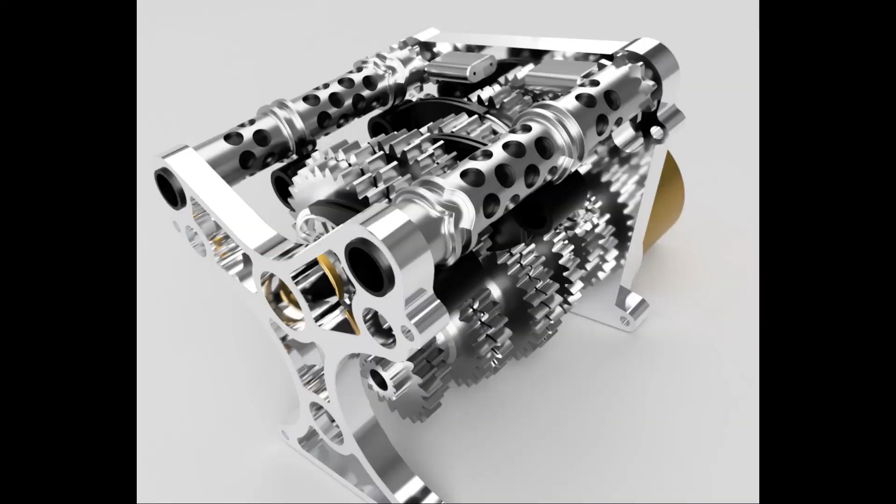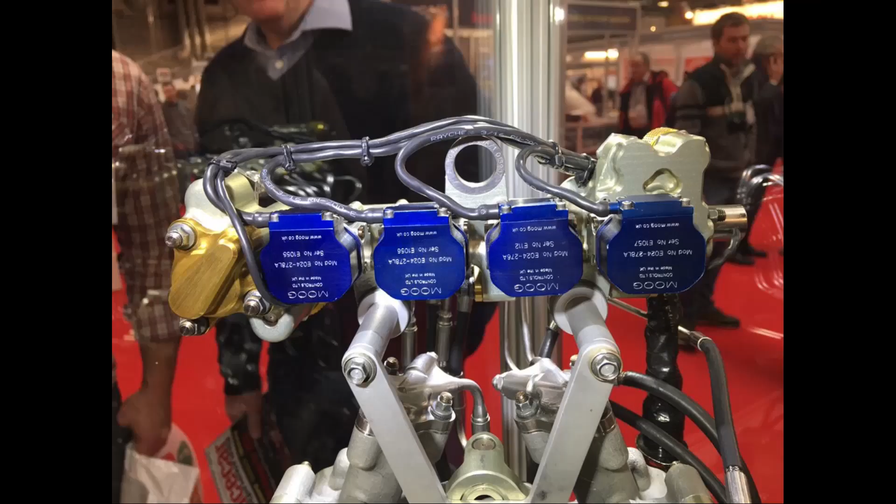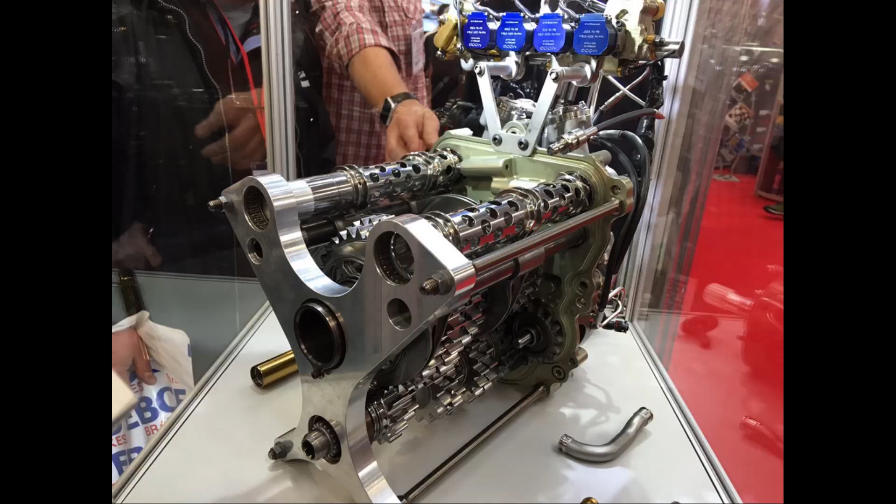Welcome everyone to the F1 Gearbox prequel episode. This episode will start off by covering how I designed the F1 Gearbox from limited information that was available, what I got right, what I got wrong compared to the actual F1 Gearbox, and what would need to be changed to machine a gearbox like this for use in an actual race car, and why you may or may not want to do that. So how did I design this gearbox?

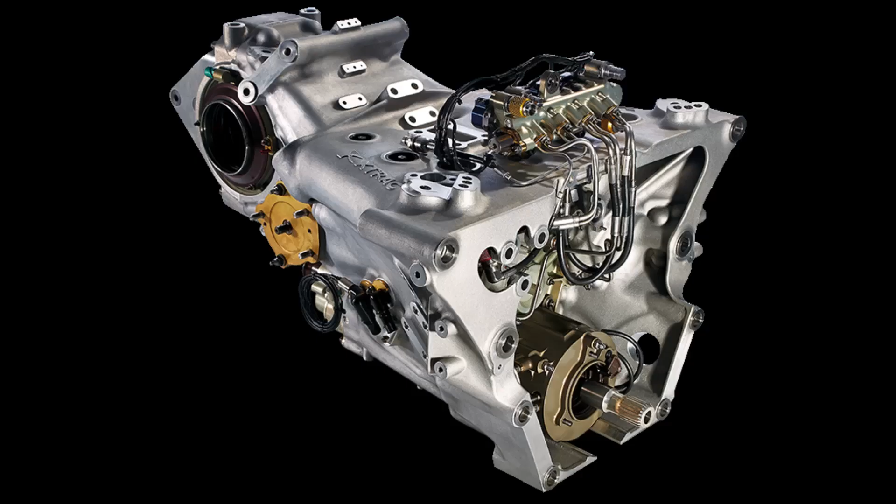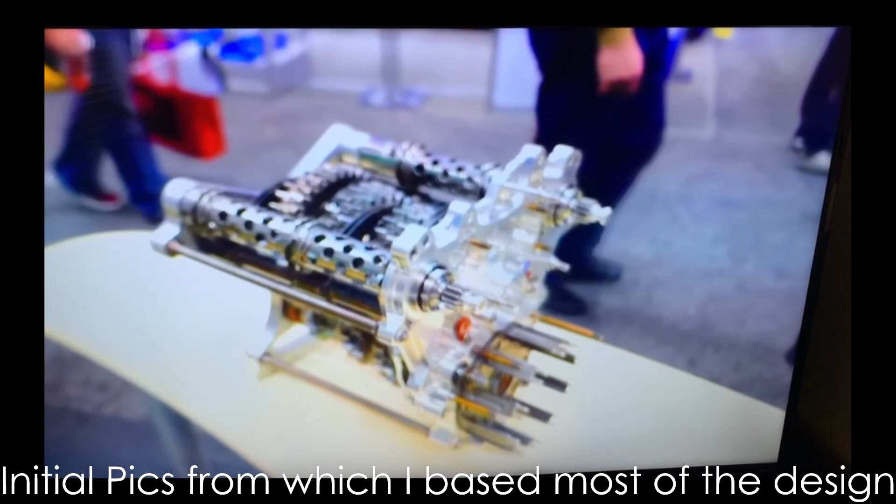Well, I don't want to talk about how I designed each and every part, but I want to highlight some of the approaches and lessons learned and how I designed some of the more challenging parts. Initially, I saw this gearbox about a year ago on a random YouTube video. I thought it was the most beautiful gearbox I'd ever seen. The level of engineering, perfectionism, and the attention to detail in each and every part was amazing. I thought it was a real work of art, and so I said to myself, I've got to build a model of that.

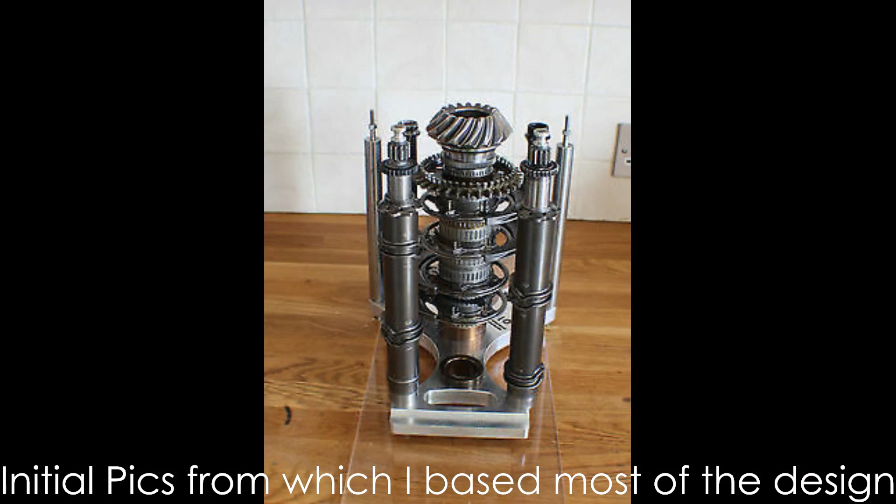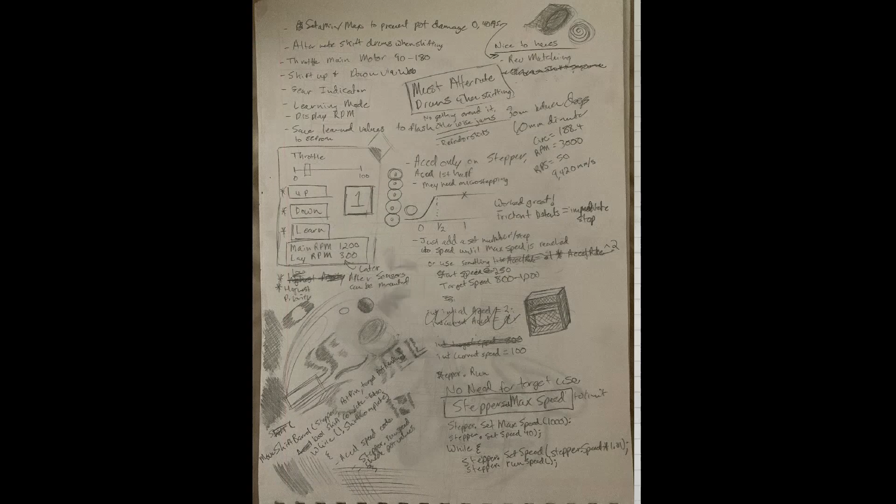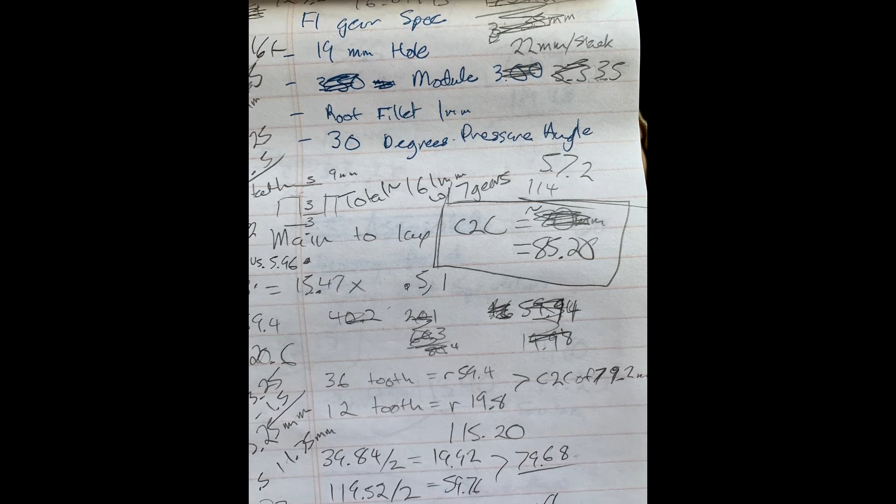I was limited on how much time I could work on a computer, so I conducted a lot of research over about a year there, and made a lot of hand drawings of the various parts and pieces for several months. Initially, I was only able to find a few pictures of the gearbox, so I actually reverse engineered most of the gearbox from just these few pictures that I just flashed up. I devised all the dimensions based on a few key dimensions I was able to find in the FIA rulebook and some various articles about Formula One gearboxes that I had read.

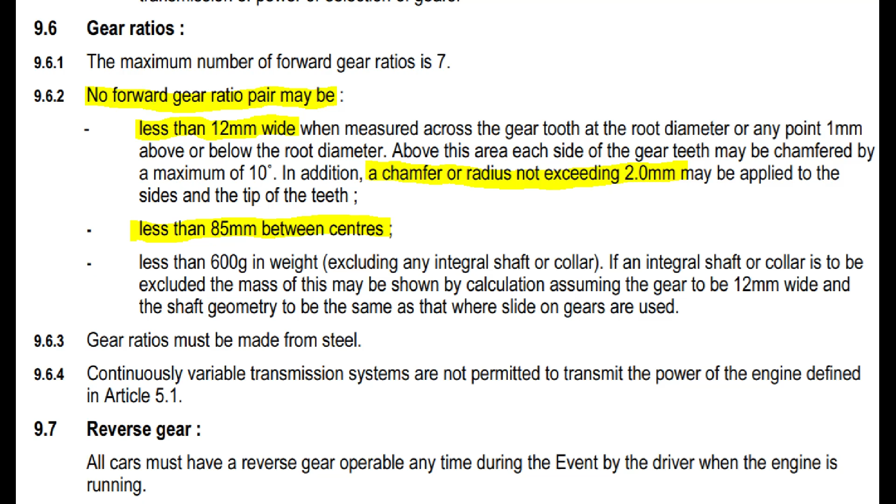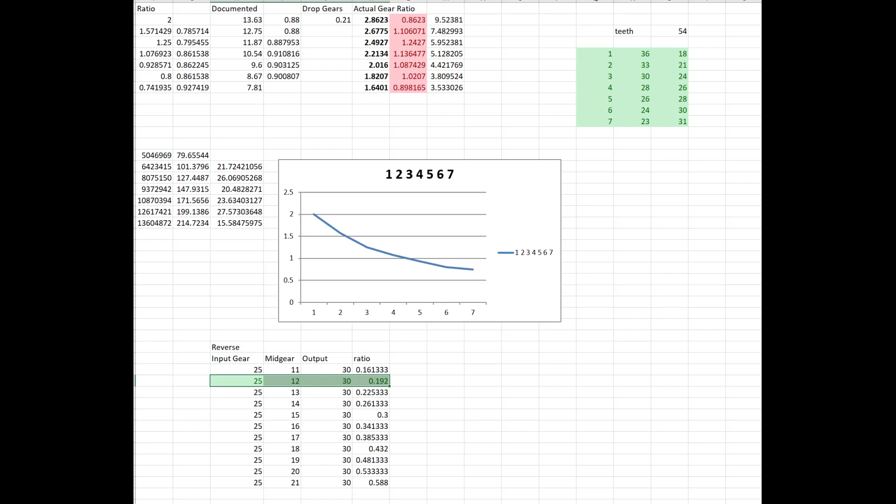Per the rulebook, I knew that the gears had to be at least 12 millimeters wide, and that they had to have center to center of 85 millimeters. I knew from reading online that these gearboxes were under 200 millimeters in length. I didn't have an exact length, but my goal was to be under 200 millimeters, and that the clutches and the basket that the clutches are in is around 110 millimeters in diameter. Everything else from there was really just eyeballing and filling in the blanks to try to figure out the dimensions of all the individual parts.

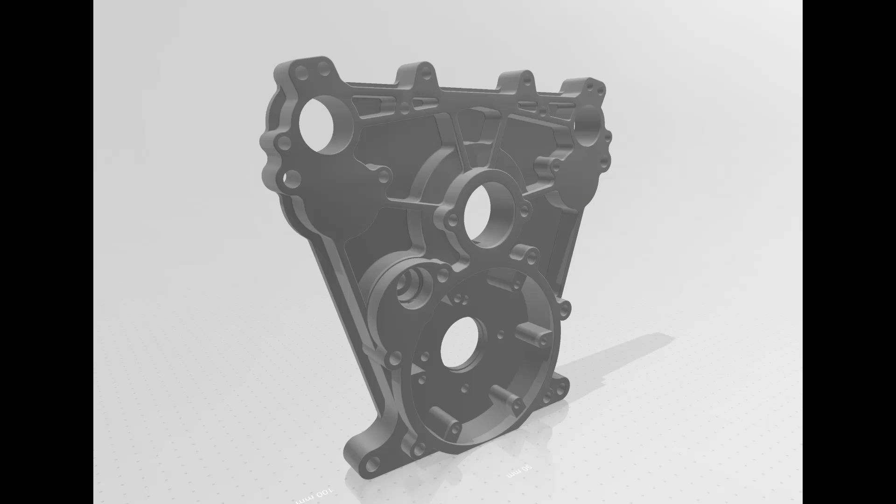So the first thing I did once I had access to Fusion 360 was I created at least 20 complete throwaway proof of concepts around each of the individual parts that I thought was going to be difficult to design, or I had a hard time envisioning in my head how they would fit together. I used these to confirm that all the dimensions would work and determine if the parts would be 3D printable.

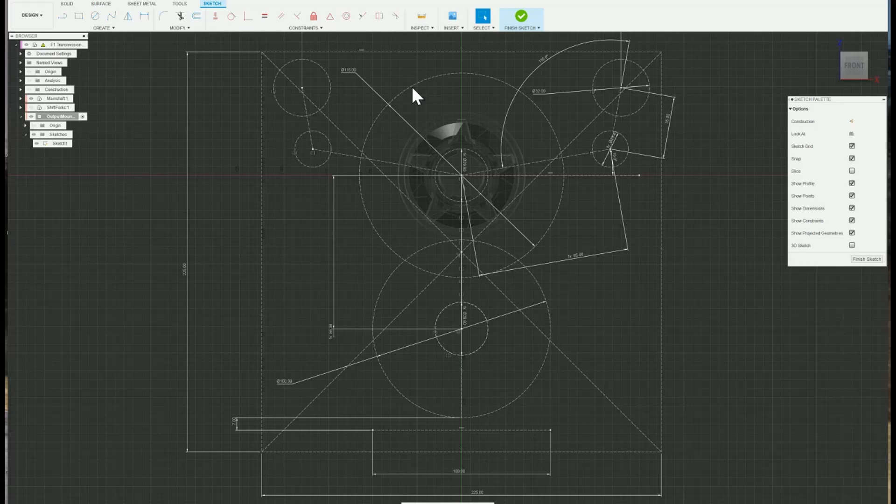Once I had my proof of concepts out of the way, I began laying out the overall gearbox dimensions. This first sketch that's up on the screen here is actually the template that allows me to lay out all the parts and pieces of the entire gearbox. It has where the rods for the shift forks are, where the shift barrels are. It has the largest gear of both the main shaft and the lay shaft. It also lays out essentially the diameter of the bearings around the lay shaft, and it lays out the bolt holes for the threaded rods.

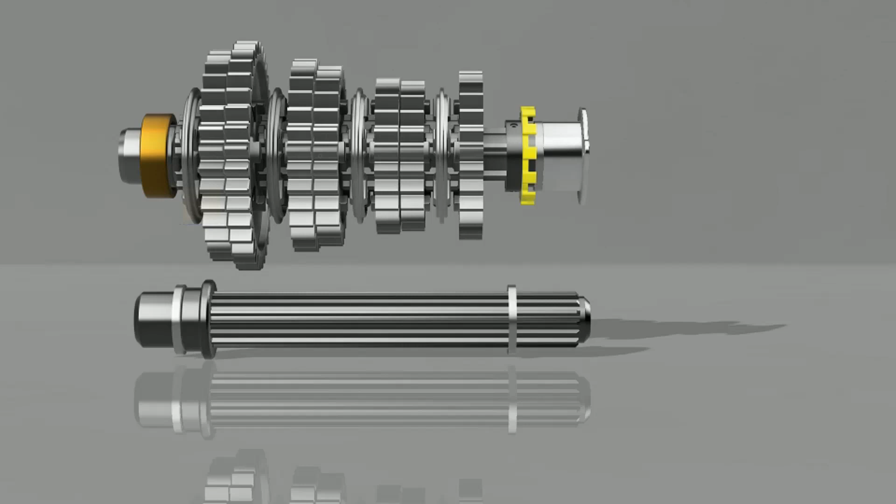Now, here's where I made my first mistake with Fusion 360. I began designing all the sub-assemblies in a single file. If I was to do this over again, I would for sure make separate files for the lay shaft and the main shaft and the other large assemblies, all of which reference this initial sketch for layout purposes. As it stands now, I have 16 fully filleted gears and just a huge number of fully modeled parts that I can't really make changes to the early parts of the design anymore. It can take several minutes to recompute a change.

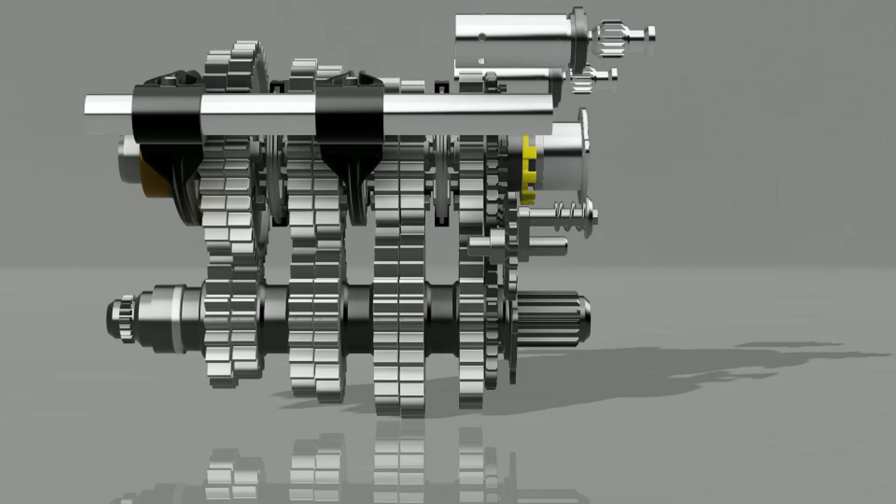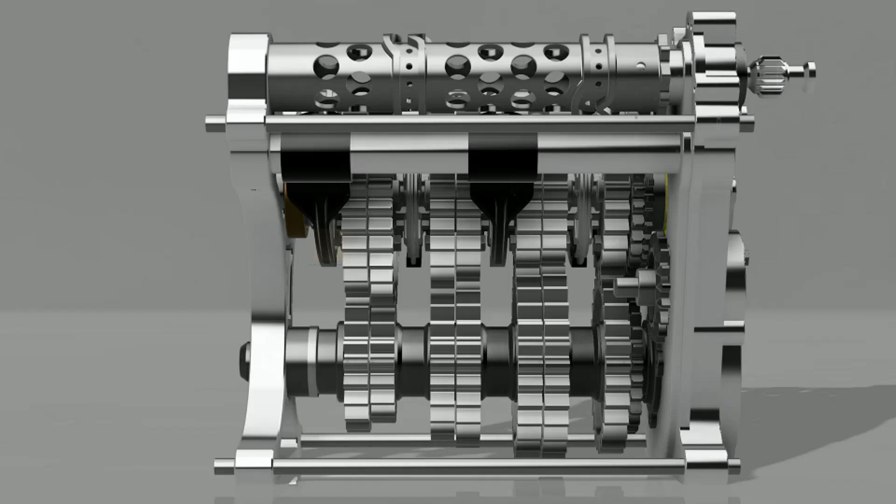If you're interested in designing large assemblies in Fusion 360, you should really check out Wintergatan's channel. He creates these incredible complex musical machines with thousands of gears and moving parts. He ran into the exact same issue I did with Fusion 360 and actually got to work with Autodesk to come up with some ways to improve the performance.

So the first assembly I started working on was the main shaft. I initially designed this main shaft based loosely on a design I had found online. I thought it was the same main shaft for all the gearboxes, but I've since found out that the 5 spline shaft is actually a Honda specific gearbox feature. All the other ones use the same number of splines as the lay shaft, but I'd already designed it, so it was a little too late to work on that.

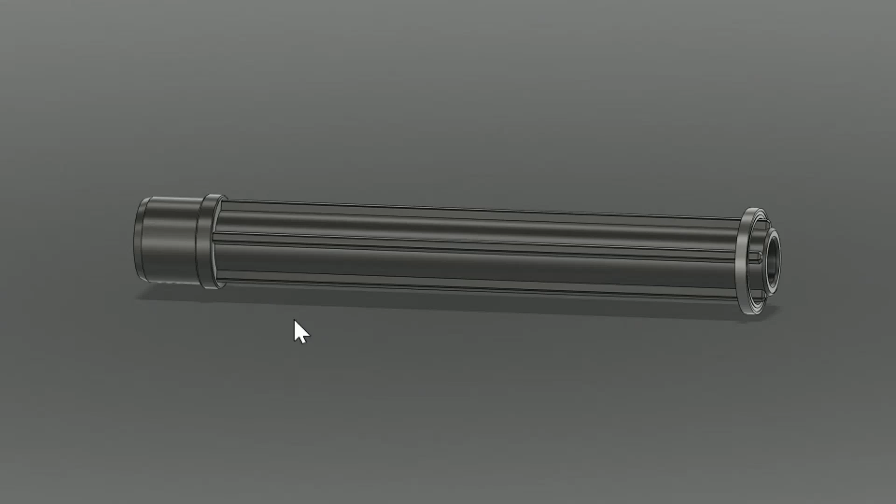But first I designed this spline, and then I started off with designing something called the gear centers, or at least what I call the gear centers. The actual piece with the dogs is identical for all 7 gears.

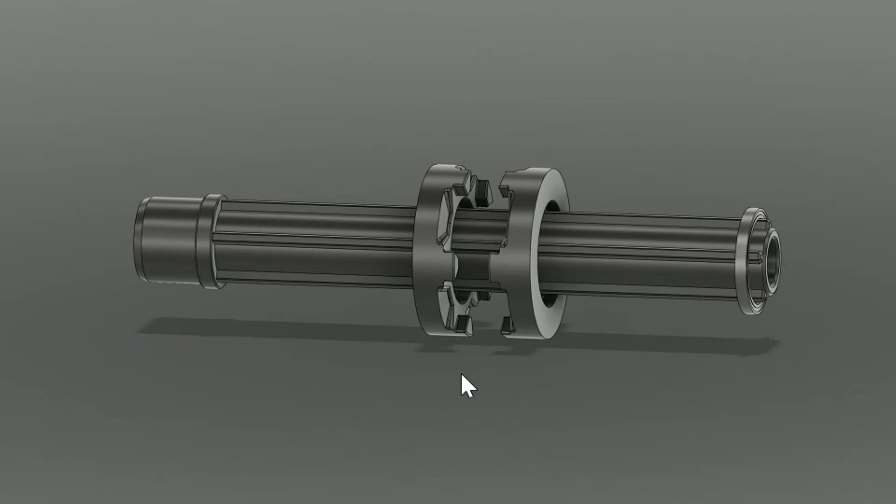And so to make things a lot easier on myself, and if I have to make any updates or changes, I essentially design one pair of these dogs, actually just by mirroring them, and then I actually pattern out the remaining gear centers. And this allowed me to kind of play with the spacing between the gear centers and

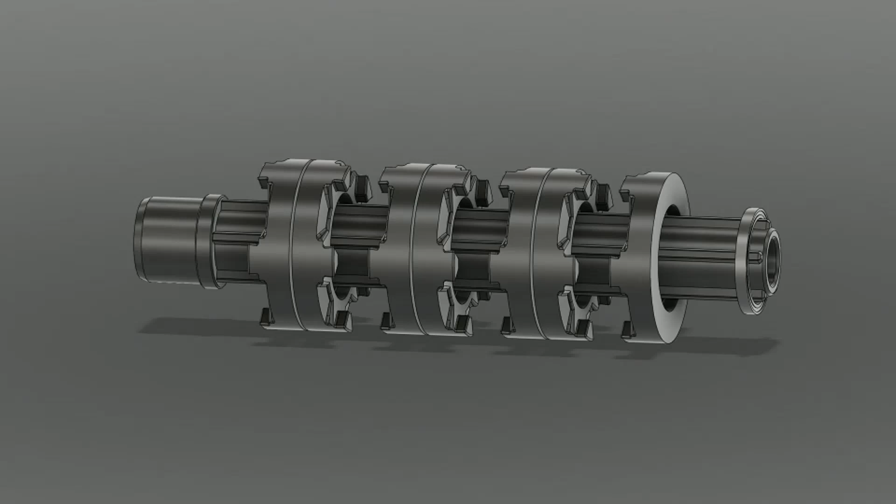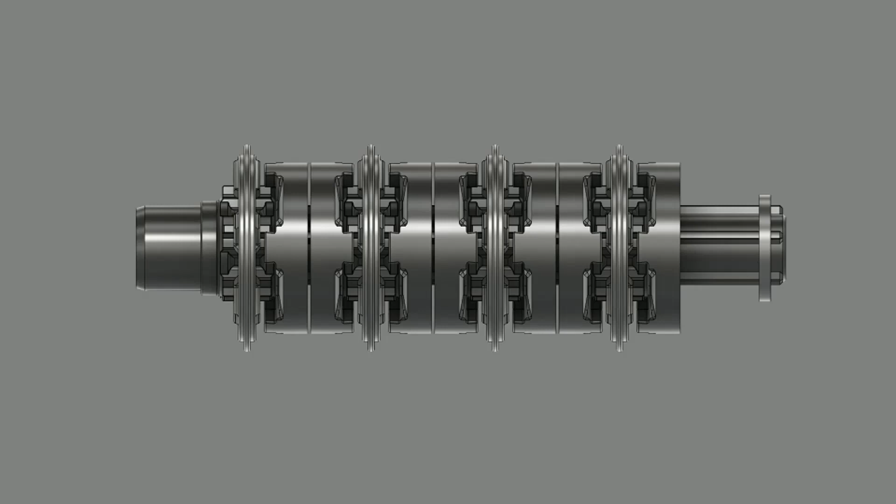try to get it just right, so that as I started designing things like the slider shaft hubs, which go in between these, and then the actual sliders themselves, I could figure out how much space I actually had between each gear to work with, because that was probably one of the hardest things to figure out, was how much space I was going to have in between each of the gears, so that I could get everything in there that I needed.

It was a much tighter fit than my previous gearbox. As you can kind of see here, there's nothing that has a tolerance over 0.2 millimeters. So it's a very close fit for a 3D printed part.

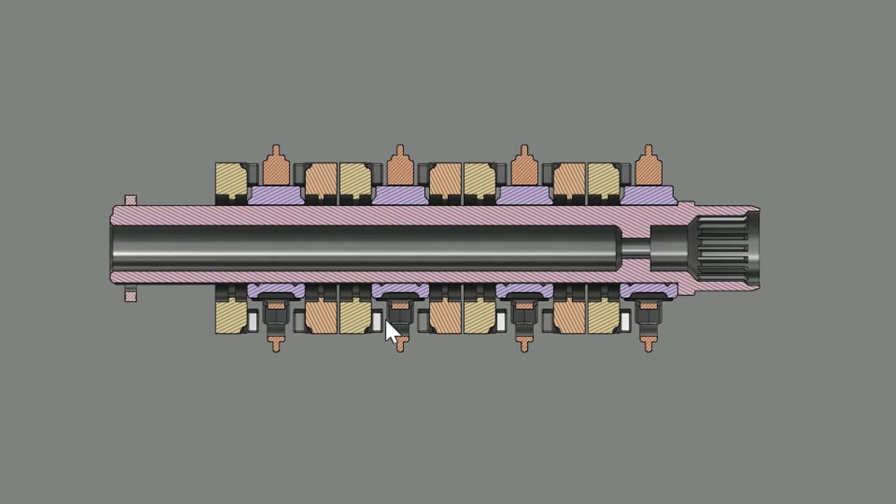Once I'd created this main shaft with no gears on it, I came back and I just used an add-in for Fusion 360 called FM Gears, and I created all 7 gears. I aligned them to their particular position, and then I essentially extruded a hole through the whole assembly, or through all those gears. And then as the last step in my actual gears history, if I go on one of

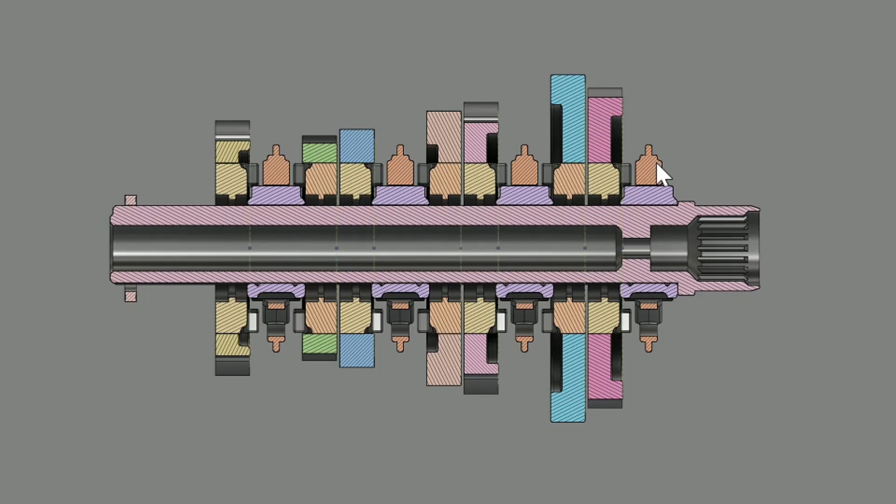these gears here, is that I actually do a merge. I usually suppress it there, but I do a merge with that gear center and its gear, so that I can export it as just a single STL.

With the lay shaft, I took the exact same approach as I had with the main shaft. Of course, it was a lot easier. I have separate gear centers for every single gear, and then these spacers are patterned out so that it just aligns the lay shaft gears in the same spacing as the main shaft gears.

One thing that is really nice about having this gear center approach is that you can print out test parts, and you only have to print out that center to see if they fit on the main shaft itself, or the lay shaft. This was super helpful because I had to print a ton of different versions with different tolerances to try to get these to work. Once I got them to fit together, the nice part was then all 7 of them were instantly the right size.

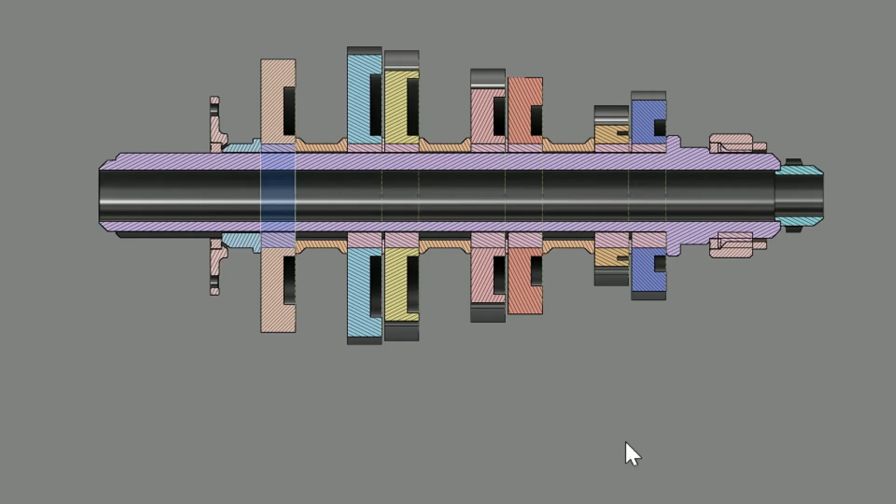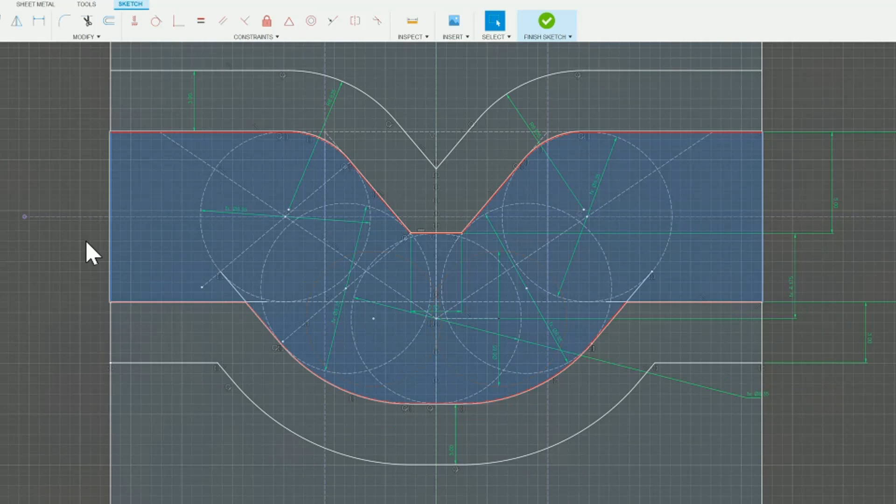So this here, this blue path that's lit up, actually represents the path that the shift pin follows. 3 circles represent the shift pin at each of the critical points, and that allows you to essentially design nice curves and transitions and arcs into this process so that you get the perfect spacing between the 2 sides of the slot.

Now, there's also some additional space. For example, there's actually a little bit of extra space on this side of the shift pin, and that's because as the shift pin's coming through, this is not a critical dimension. This is the critical dimension. This is where all the pressure is because the shift fork is pushing the shift pin back against this as it's being slid.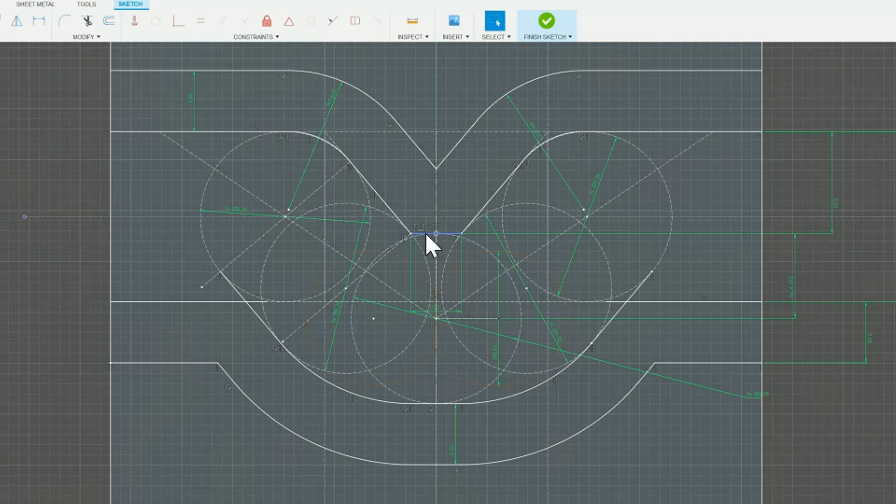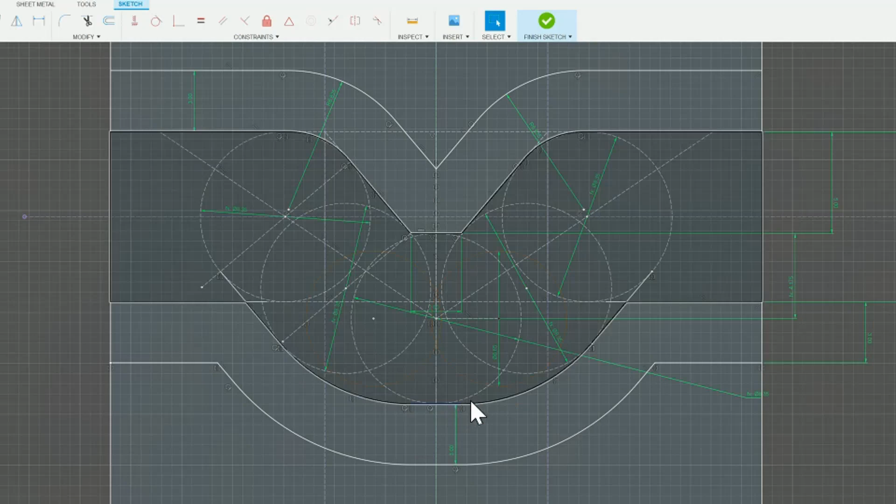What I've noticed in all the gearboxes is they don't hold a shift fork pin exactly in place. They only get it to the point that it needs to be, and there's a little bit of give once it's actually in that place. If you make them too tight, they bind up. There can be little tolerances in the shift fork between the angle that it's actually on the slider, and it can bind these up pretty badly. So if you actually look on the real F1 gearboxes, this particular line here for the slot is actually considerably larger than the actual pin.

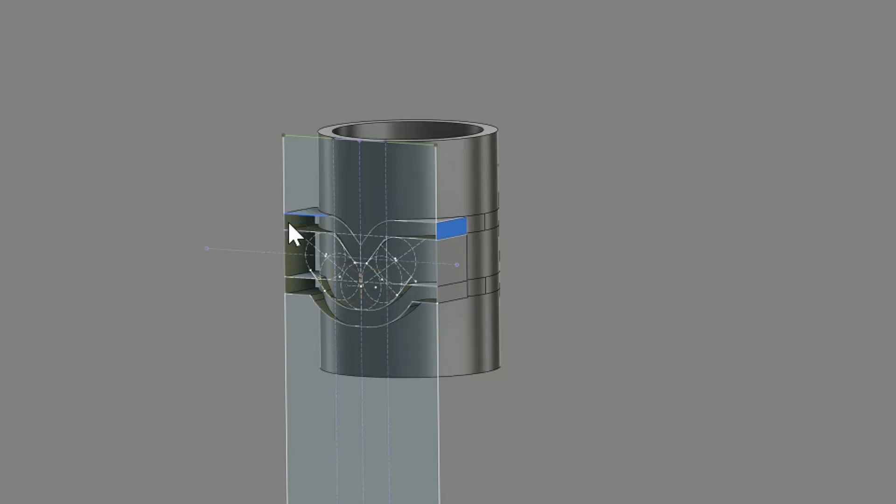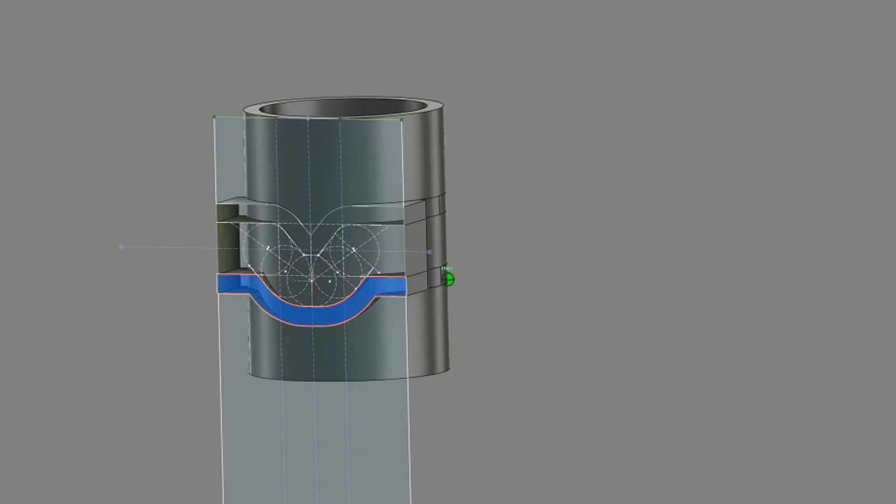So what I do from there is take that sketch and I place it on a plane that is parallel to a solid that represents the actual shift barrel itself. And then I extrude a surface from each of these parts of the sketch and have them go all the way through the shift drum itself. Then I use the split faces tool, and I split the faces that are here. And so that leaves me with, let me see if I can hide this, a solid that has its front face split where I want it to be.

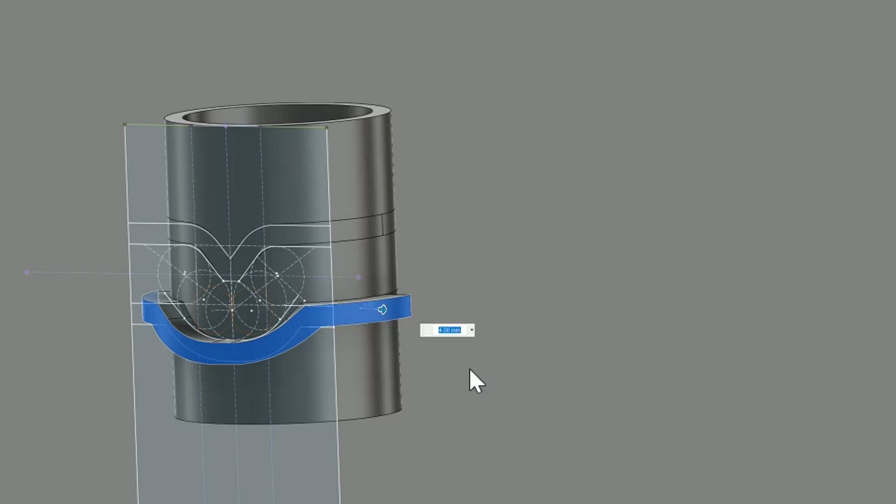And then I can use the offset faces tool and pull these out. And that's how you actually get your slot. So once I've completed this, I'll come back and I will cut these at, I think it's 80 degrees. So it would be the 40 degrees in the middle and then 20 degrees on either side. So that gives me the total shift point of 80 degrees.

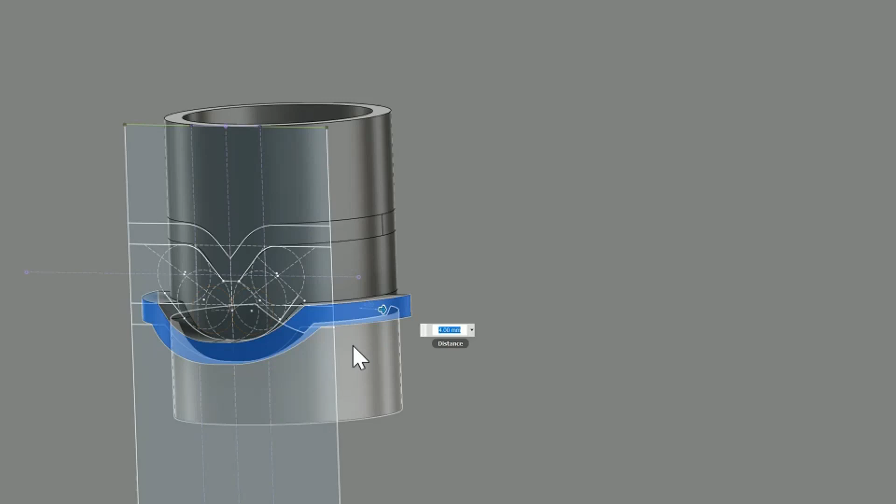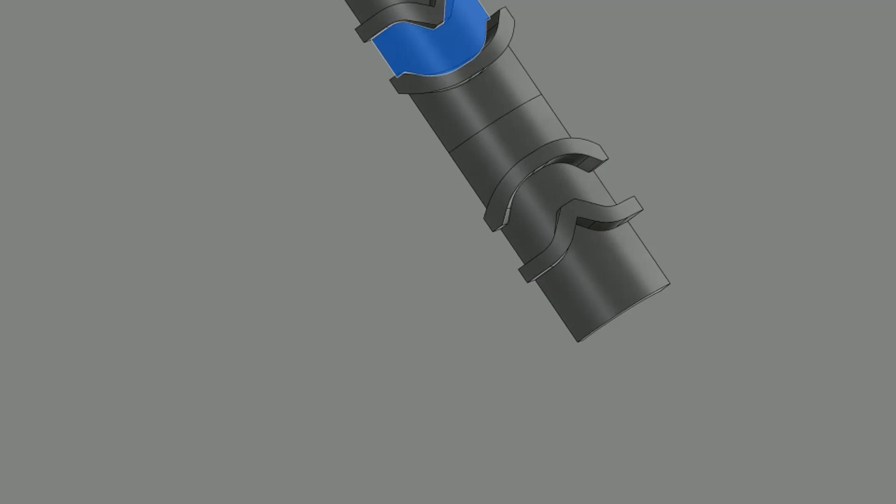I then take that part, and I'll show you in the next step, I do a bunch of manipulation with that part so that I can come up with everything needed to build the shift barrel. Okay, so here's how I actually build the shift barrel itself. As you can see, these are the actual slots that we just cut out in the previous step. And what I've done is I've mirrored that so that I have my selector fork going left or right, depending on which way you're looking at it. And once I've mirrored it, I take it the next step further and line these two up.

So the way these shift barrels sequence is it's going to shift one direction, then it's going to have a no select in between, and then it's going to shift the other direction. Once I actually build this all up, I can show you a little bit more. I've actually had to build a whole table to figure out which direction these shifts have to occur and in what order to have them be sequential. Otherwise, it won't shift in order.

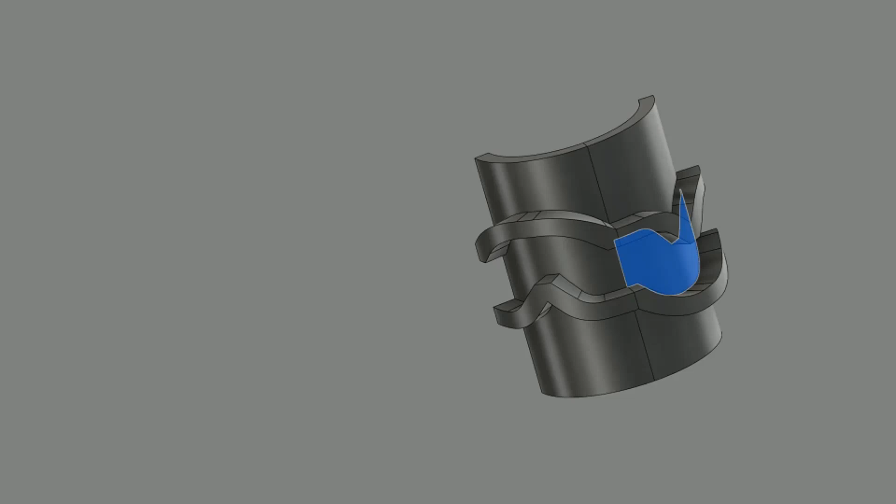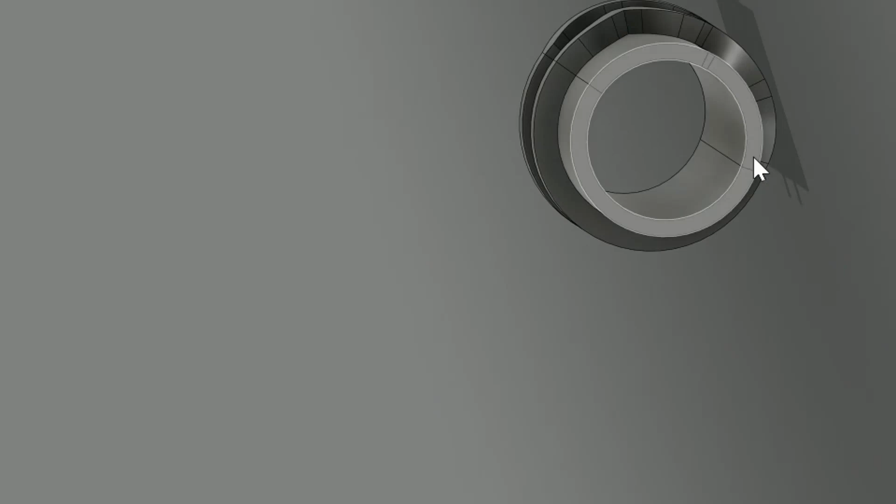So the next step is I just do some maneuvering around. Skipped ahead there. But that last step I do is, once I get the parts into the positions I want, and they overlap just a tiny bit because of the way I cut them, I do a sweep from this side to the other side, and that gives me the remaining part of the shift barrel, which is the no selection portion. And then I just do a merge on all those parts, and you eventually end up with a ton of these little parts, one for each of the shift barrels.

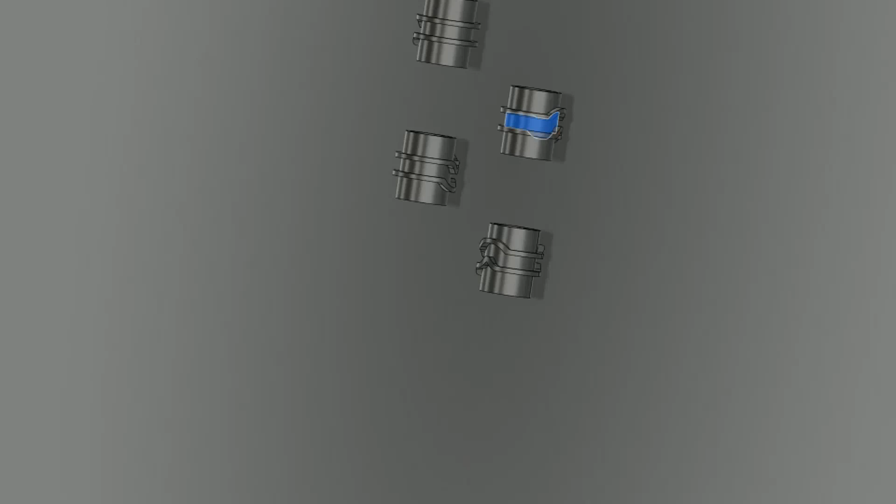So I created a bunch of construction planes that were in the middle of each of the shift points, essentially where the slider was perfectly aligned in the middle, and then I lined up each of these shift barrels with that.

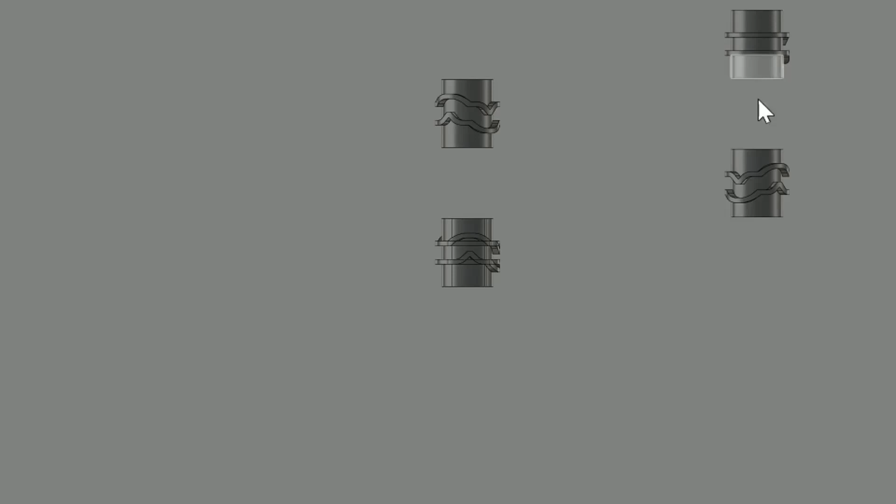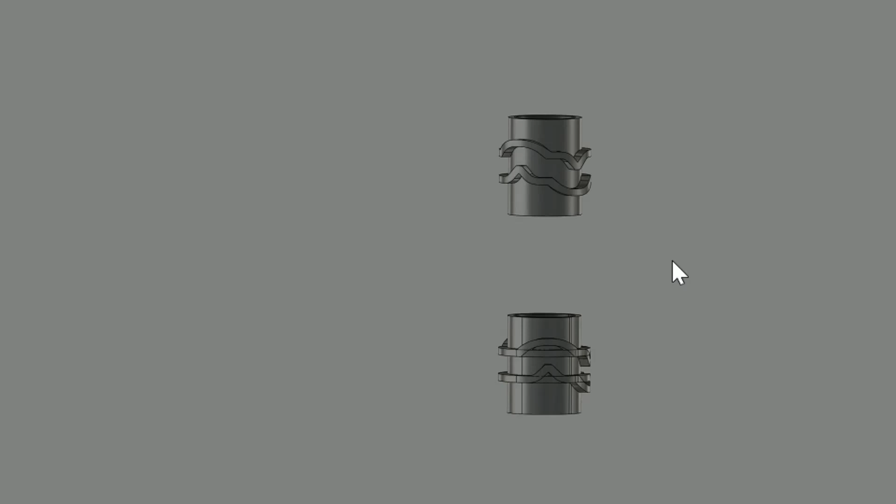Then based on that table that I had created as to which direction each gear required it to shift, I positioned each one of these in accordance with whether it's moving the shift fork this direction, or moving the shift fork down in this direction. And then finally, the last bit of positioning is I went through all of these shift barrel parts, and I actually rotate them so that their actual shift point, this line here, lines up with where they should from a sequencing standpoint.

So essentially the way this shifts is it's a no select, and both shift barrels are going to be in a no select position, and they're going to rotate inwards. So they both rotate towards the main shaft, and as they're rotating, it's going to upshift. So the first 40 degrees, the right shift barrel will select first gear. Then the left shift barrel will still be in the no select state. They'll both rotate again. The right shift barrel will now deselect first gear and be in a no select state. And then the left shift barrel will select second gear.

So that was the easiest way for me to do this, was to actually walk through based on that table that I had created in Excel and figure out if each one of these shift points aligned as I was rotating it around. Once I had them all aligned and I felt comfortable that it was shifting properly, the next challenge is the shift pins are at a 10-degree angle relative to the shift barrels. So I had to rotate the entire shift barrel 10 degrees, both parts, in opposite directions, one going clockwise and one going counterclockwise, so that the shift pins relative to the shift barrels and the shift points would now be aligned. And yes, I did get this wrong several times.

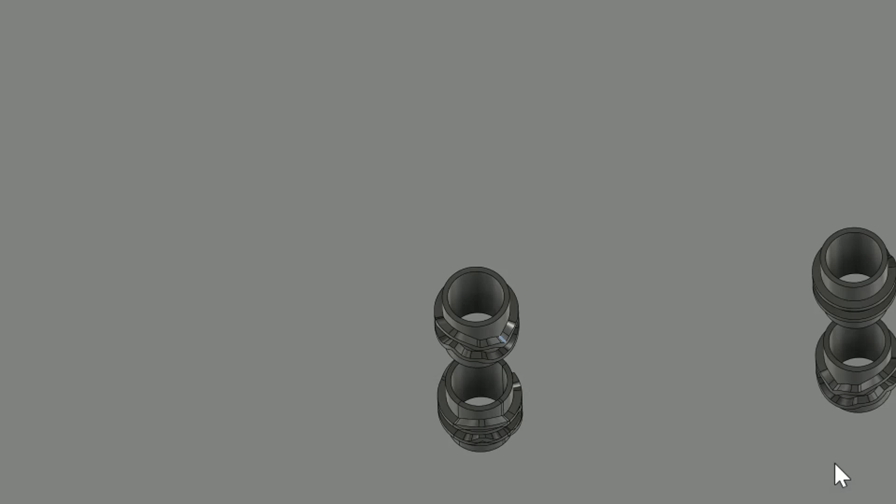So I printed out a test shift barrel, and I had a little mock-up rig, and I would go through and try to figure out whether each one of these parts actually aligned. And that pretty much wraps up the gearbox design. Things like these holes in the shift drums, I essentially just used the hole tool, made a series of holes around one side, and then I patterned the rest of it out with circular and rectangular patterns to copy those holes, and then I would remove the instances of the holes that would overlap with the slots themselves.

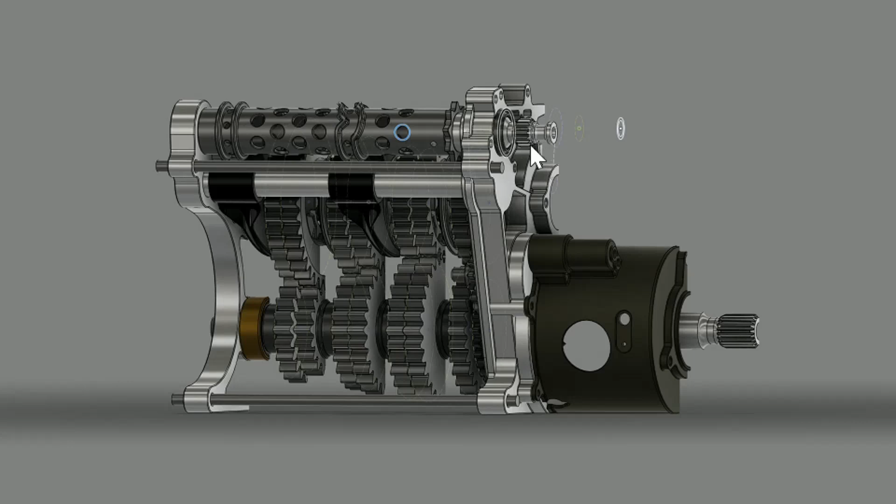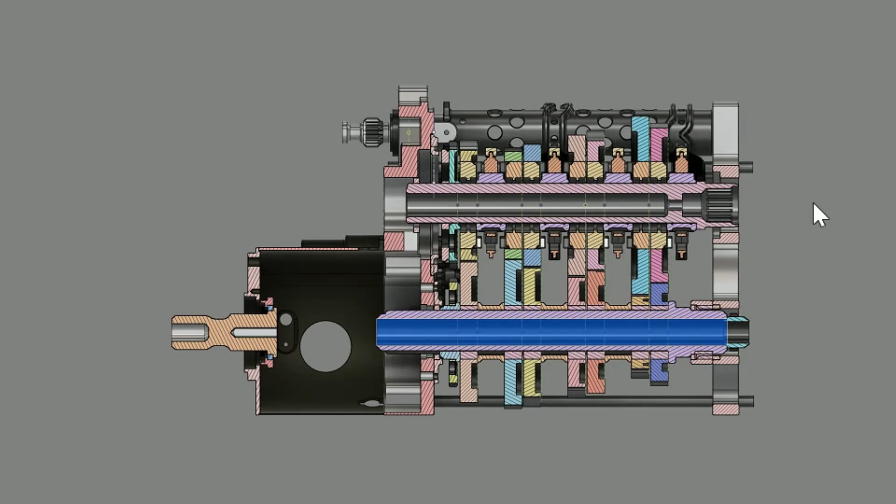These I initially designed because they're more like the real one, and I was planning on potentially trying hydraulics to actually shift this, but I think that's more of a pipe dream, maybe if I have some time a long time from now. I also designed it so that if it wasn't strong enough, I was going to place metal tubes down the shafts themselves so that I could epoxy those in and make them stronger. Even the shift barrels, I did the exact same thing in case I needed an aluminum tube down them to make them stronger, which honestly they could be a little bit stronger when they're printed out of PLA silks.

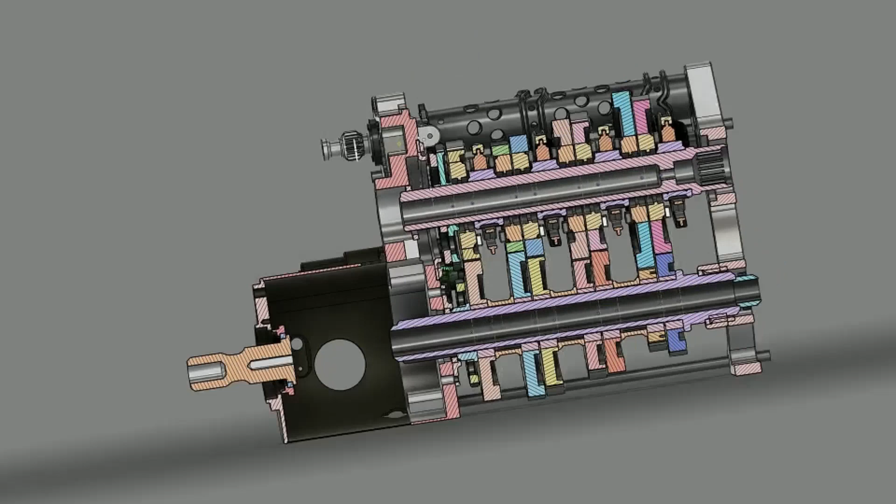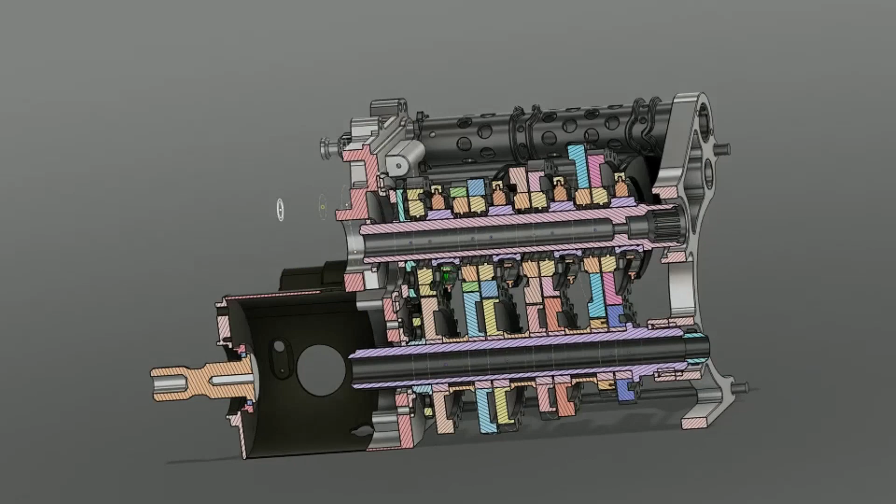But really that's the gearbox as a whole. It's not that complicated. It's just a lot of parts that replicate, and you have to figure out how they all interface with each other. That's the hardest part about the gearbox. And then the fact that there's just no flat blocky surfaces on this gearbox. Every bit of material that's not needed has to be removed. So it leads to a lot of engineering; even simple parts like this plate on the front that's the input, there's a ton of time spent making sure that there's ribs going everywhere, that it's all filleted and chamfered.

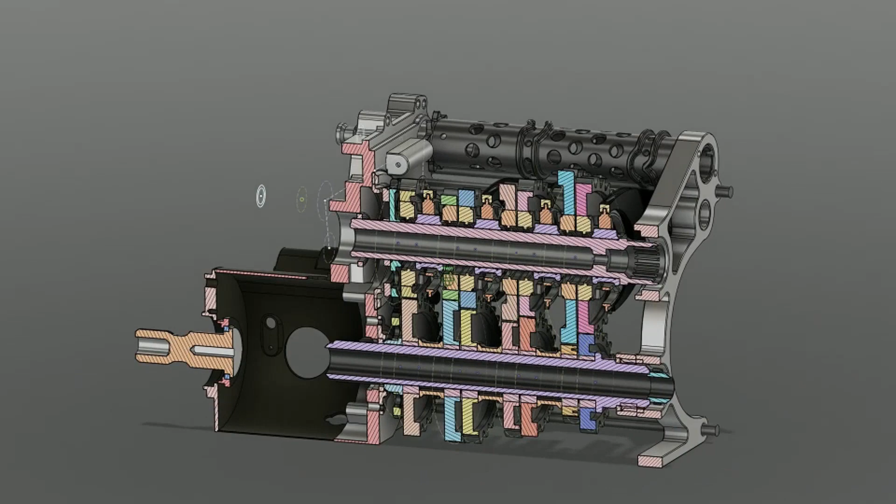That just takes a lot of time, and you can really tell how hard these F1 gearbox engineers were working to try to perfect this design.

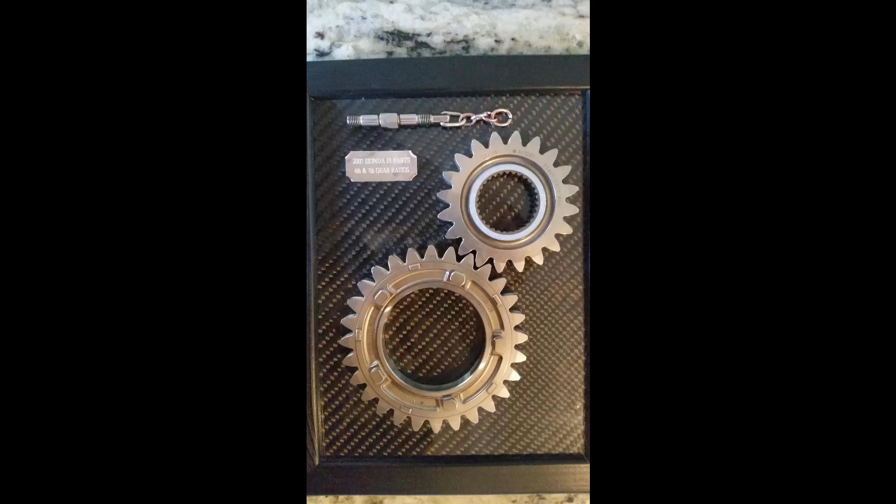Well, I think that wraps up this first prequel episode. The video is already getting pretty long, over 20 minutes, so I'll probably cover in the next one what would need to be changed to have a practical use for this gearbox. I'll probably approach it from a couple of directions. One, if you wanted to CNC it out of metal and use it in an actual race car, and also how you would use 3D printing, and what the best methods are from a 3D printing perspective to make this a strong gearbox.